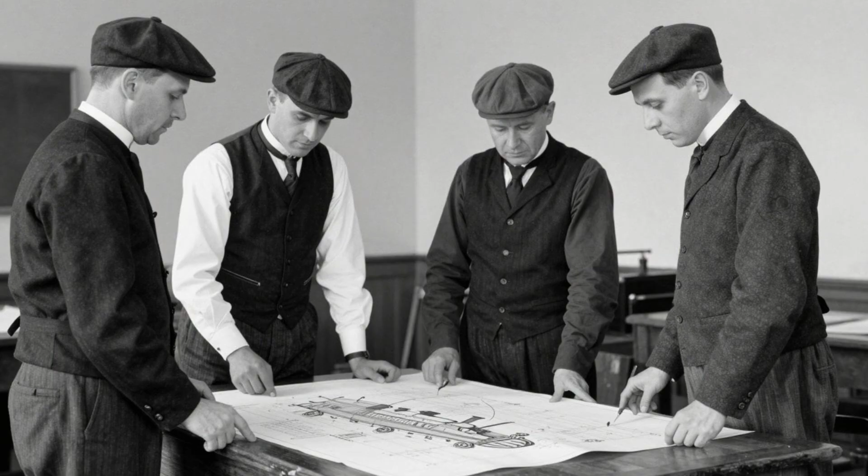But Transfer Order W, 23/1918, suggests those seized German drawings did not just sit in a warehouse. They reached the very engineers tasked with designing America's flagship locomotive.

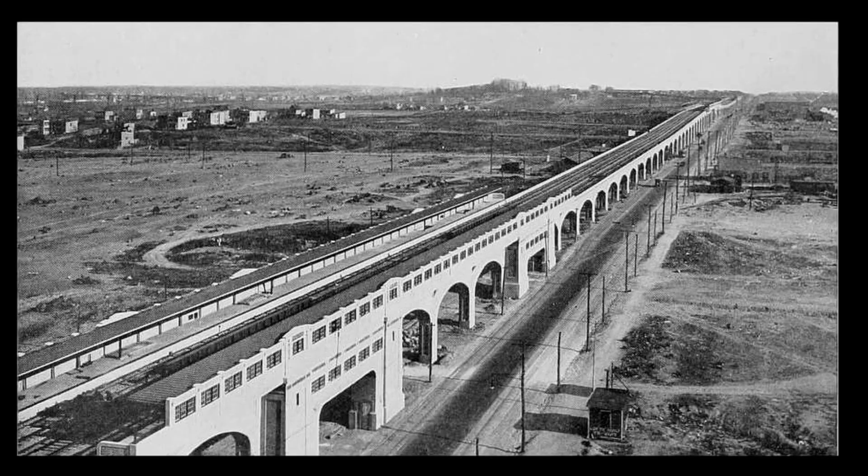To understand how, you have to go back to December 1917, when the federal government seized control of every railroad in the country. On December 26, 1917, the United States government issued a sweeping control order that took command of every railroad in the country. Overnight, the nation's tangled web of private rail lines became a single centrally managed network under the United States Railroad Administration, USRA.

The reason was simple but urgent. America's war effort was choking. Freight cars jammed in yards, coal and munitions were stranded, and troop trains were delayed by days. The old system, with hundreds of companies each guarding their own schedules and equipment, could not keep up with the demands of a global conflict.

Federal officials, led by Secretary of the Treasury William McAdoo, moved quickly. Within days, they set up a war cabinet for the rails, drafting new rules for how trains would run, what would be built, and who would decide.

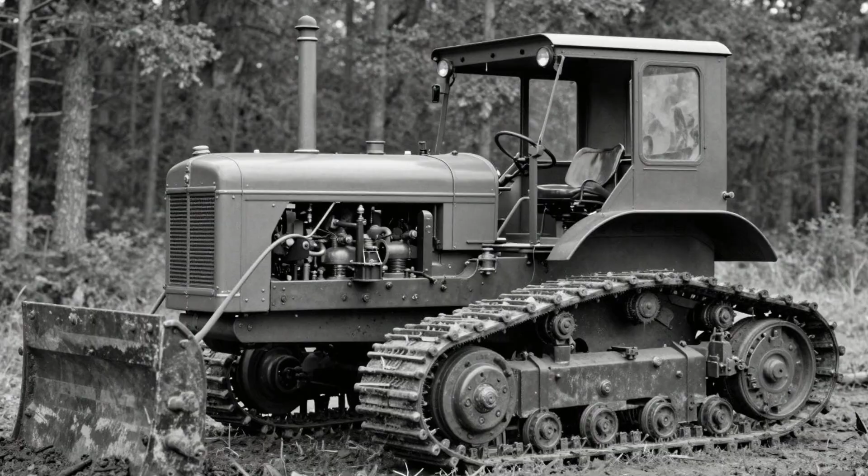At the heart of this new order was a mechanical committee, a handful of top engineers and administrators with a single mandate: standardize everything. No more custom engines for every railroad president's whim. From now on, locomotives, freight cars, even the bolts holding track together would be designed to a common pattern.

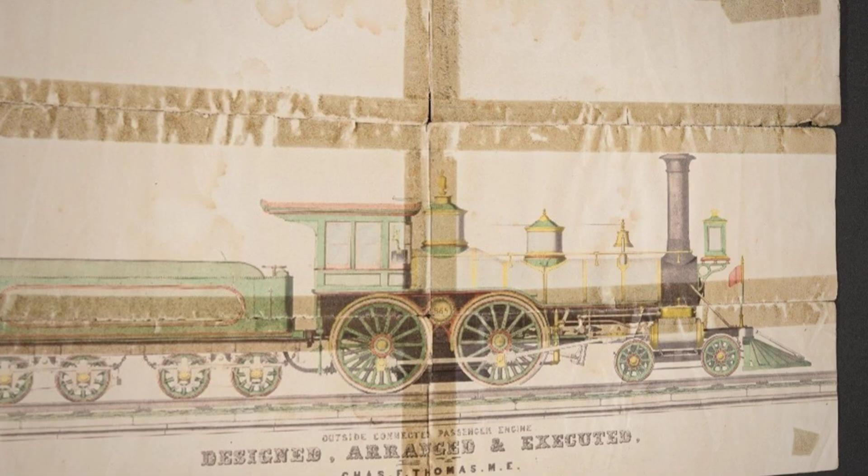The stakes were clear to everyone in Washington. If the USRA failed to untangle the gridlock, the entire American supply chain to Europe could collapse.

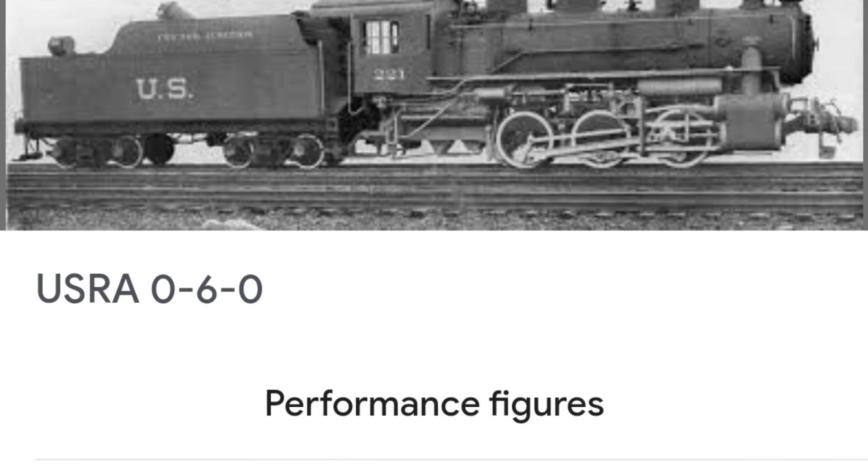The committee's job was not just technical, it was political, strategic, and, as later documents would suggest, even a matter of intelligence. Minutes from their earliest meetings show a willingness to look beyond American borders for answers. They pored over foreign engineering journals, debated the merits of European superheaters, and quietly requested seized enemy blueprints from customs warehouses.

The war had made the usual boundaries of intellectual property and national pride irrelevant. What mattered now was speed, efficiency, and victory. By early 1918, the USRA had begun to draft its first set of standard locomotive designs. Five basic types would be built in quantity, each meant to be interchangeable across the country's vast network. The goal was to keep the trains moving, no matter the terrain or the builder.

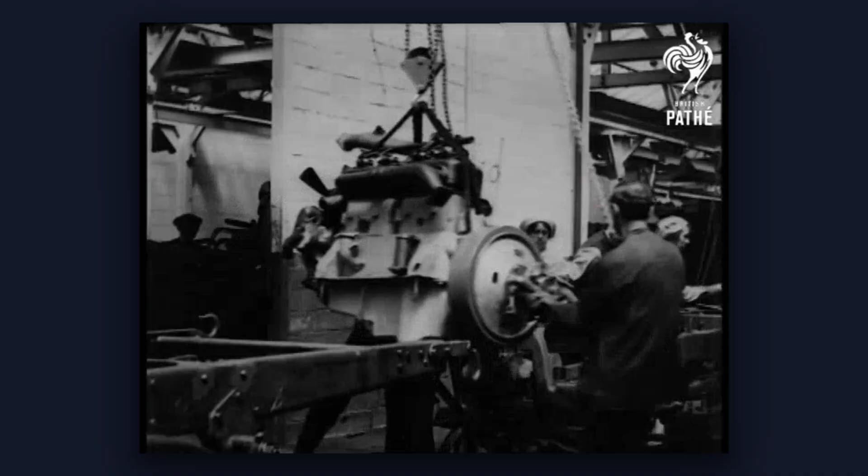But the committee's files reveal another layer: explicit references to German and Austrian engineering, sometimes by name, sometimes in code. The Mechanical Committee's authority was total. Any technical knowledge, wherever it came from, was fair game if it promised an edge.

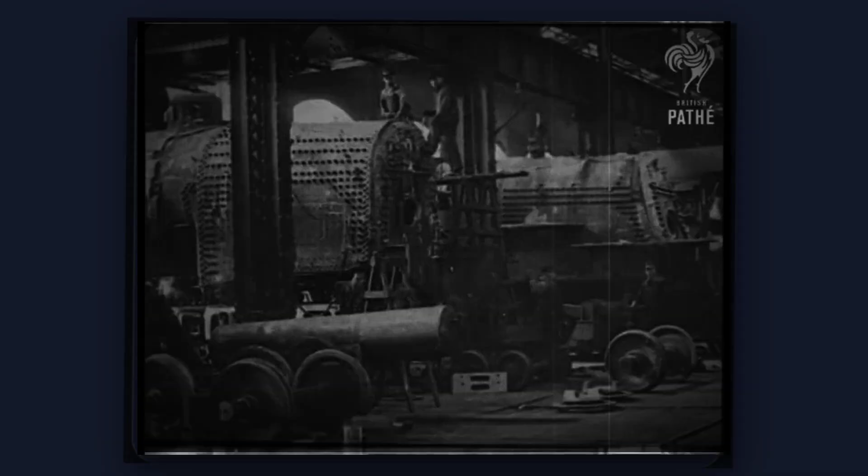The story of American wartime railroading, it turns out, was never just about homegrown ingenuity. It was also about what could be acquired, adapted, or quietly appropriated in a time of crisis.

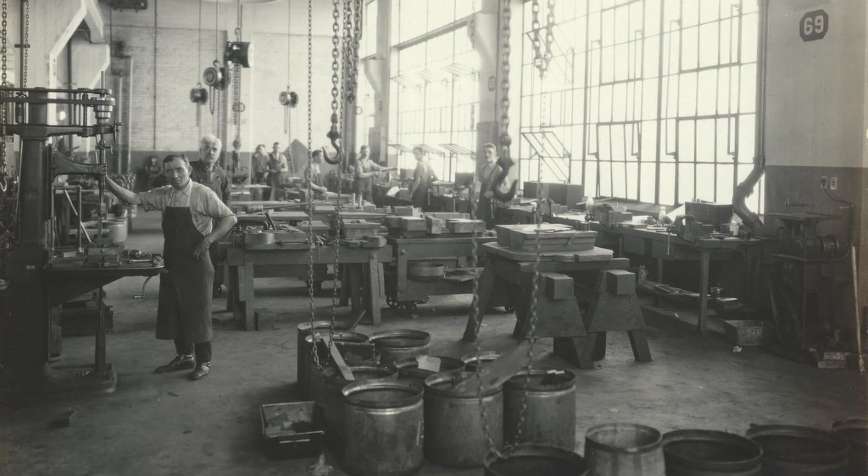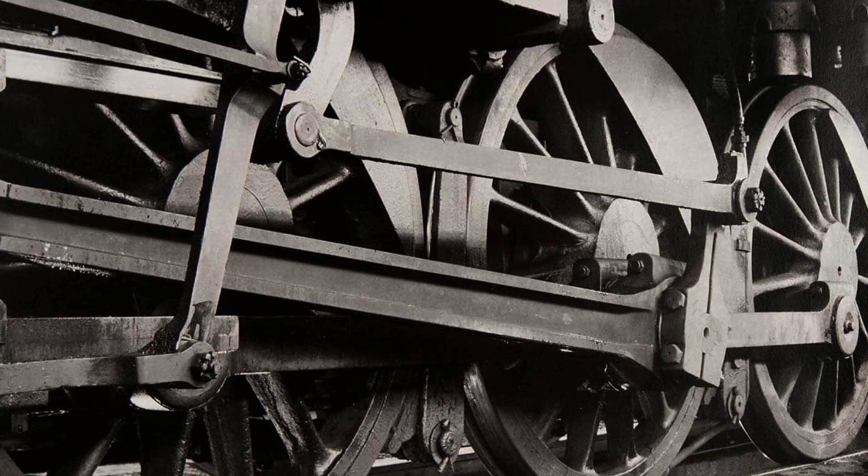Inside the headquarters of the USRA, the Mechanical Committee operated with a kind of wartime urgency that left little room for tradition. The official minutes from July 1917 capture a rare moment of candor. American engineers, facing the limits of their own experience, agreed to cast a wide net. They resolved to examine not just domestic designs, but also the latest advances from Europe, especially from Germany and Austria.

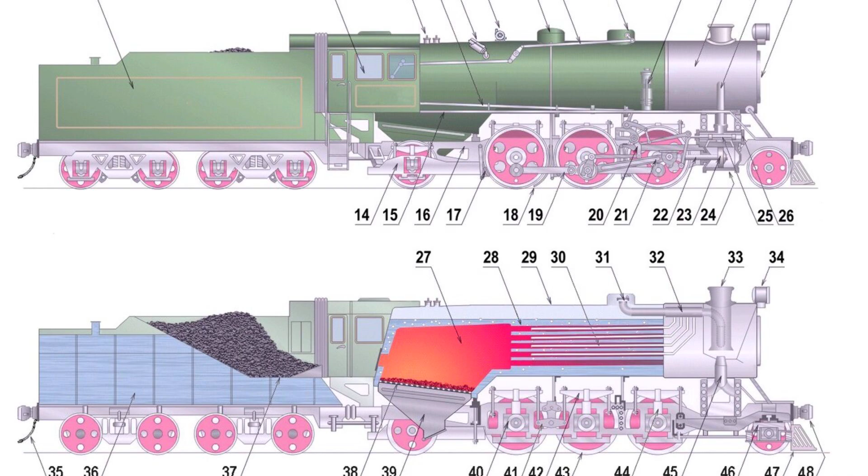The committee's language was pointed. They called for a survey of foreign superheater practice and compound engine arrangements observed on European railways, and set a target. Every new locomotive should be able to handle 210 pounds per square inch of boiler pressure, a figure that matched the best German express engines of the day.

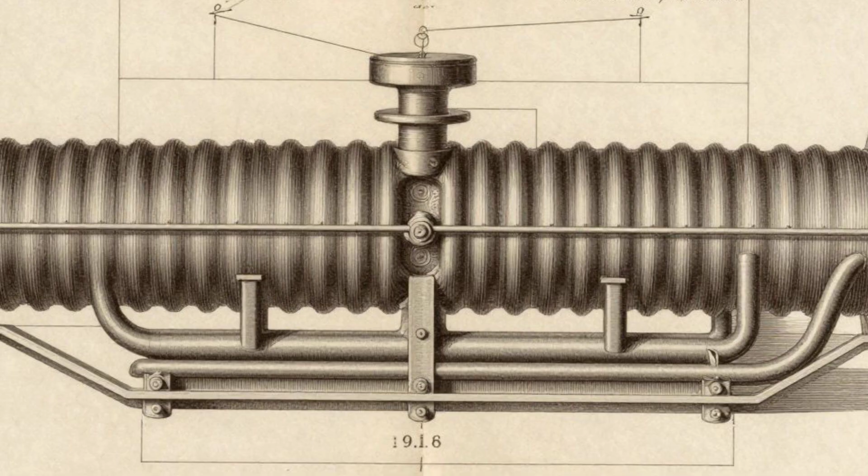This was not a half measure. The committee's July 5, 1917 minutes record a formal resolution to incorporate Heusinger-type valve gear and, wherever feasible, German superheater dimensions into the new 4-6-2 standard.

The engineers did not just read foreign journals, they requested technical sheets from across the Atlantic, sometimes through diplomatic channels, sometimes through less official means. In the words of one committee member, any proven advantage, regardless of origin, was to be considered fair game.

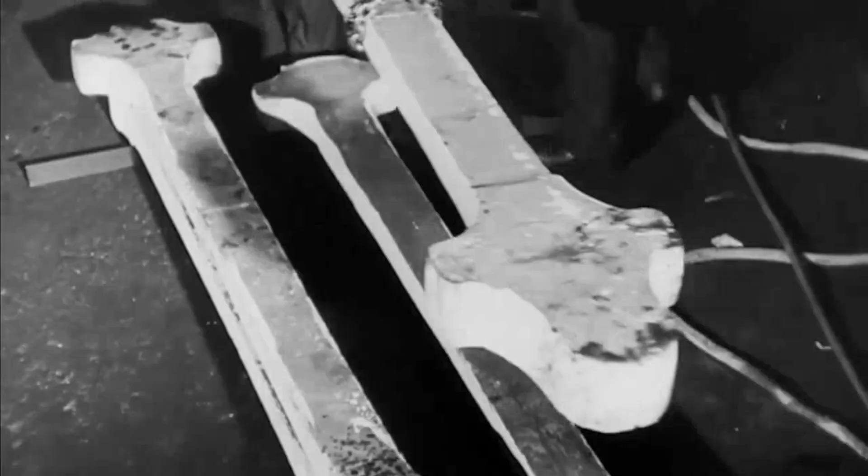The committee's openness to foreign ideas was not just about curiosity. It was a response to the pressures of war and a recognition that American railroads were behind in certain areas. Domestic data on high-pressure superheating was thin.

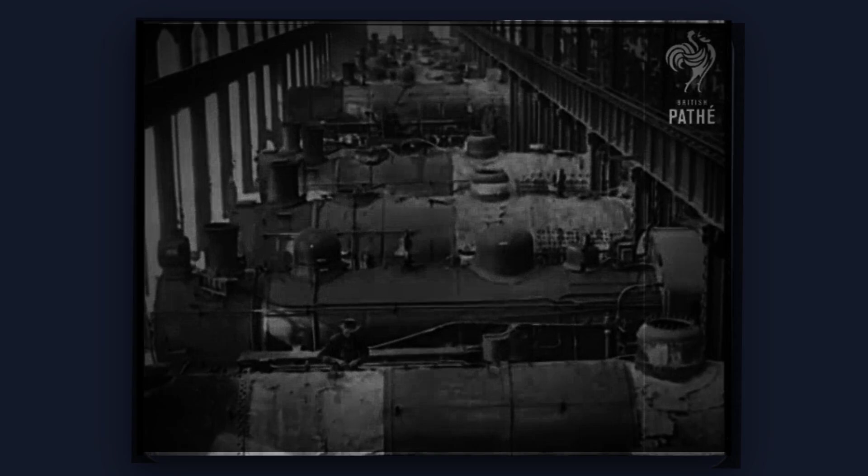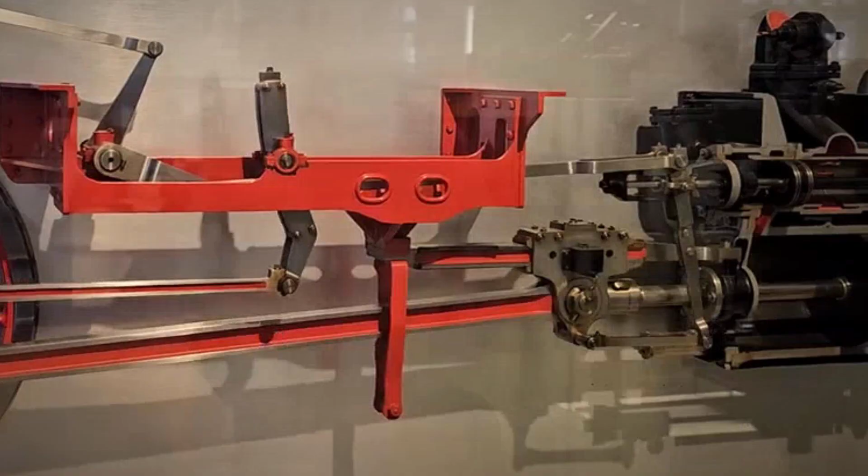European firms, especially Henschel and Krupp, had already demonstrated the ability to run larger, hotter, and more efficient engines. Rather than risk failure, the USRA engineers chose to adapt, borrow, and when the opportunity arose, integrate foreign solutions directly into their designs. This approach set the tone for everything that followed. The committee's willingness to reach beyond national boundaries, to treat seized blueprints and foreign patents as resources rather than off-limits, would shape the technical direction of the USRA standard locomotives. The 210 pounds per square inch boiler pressure, the Heusinger valve gear, the large area superheaters were not just numbers on a page, but markers of a deliberate policy to absorb and repurpose the best of what the world had to offer, even if it meant blurring the line between innovation and appropriation.

The Pennsylvania Railroad's K4 Pacific stood out in American railroading not just for its reputation, but for its numbers. With 80-inch driving wheels, the locomotive had among the largest wheels fitted to a passenger engine in the country, built for high speeds on long, straight tracks.

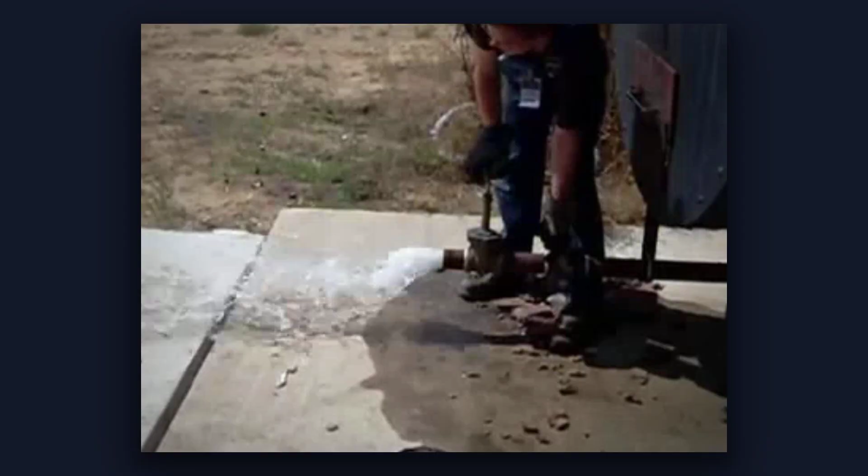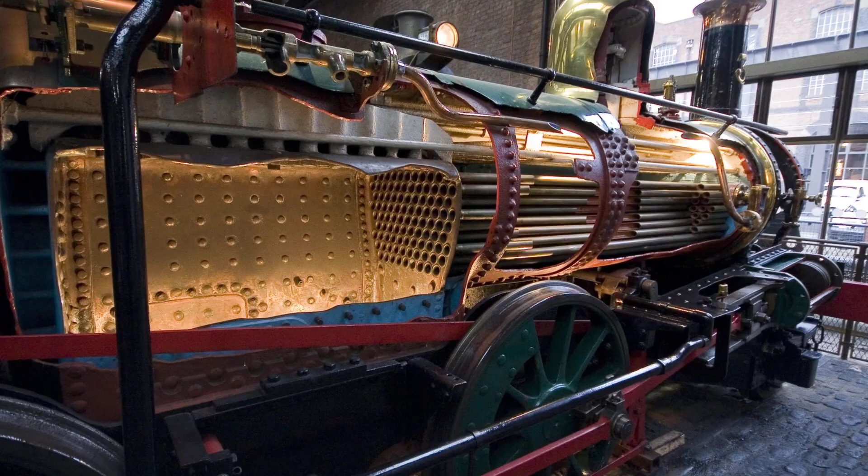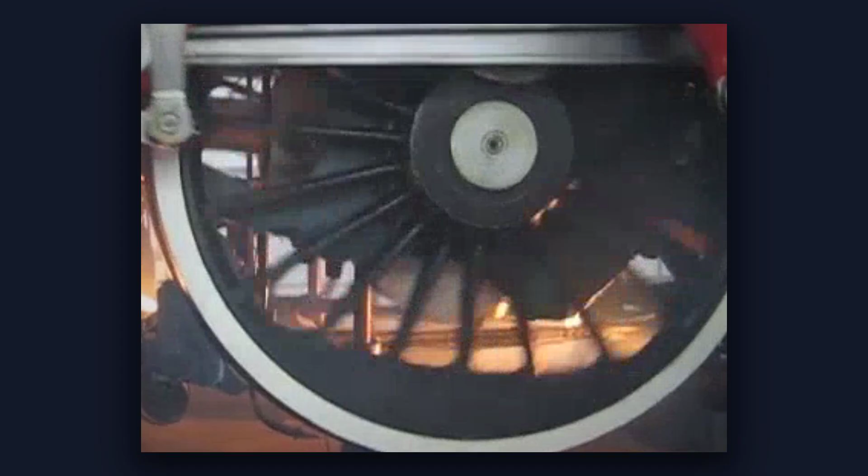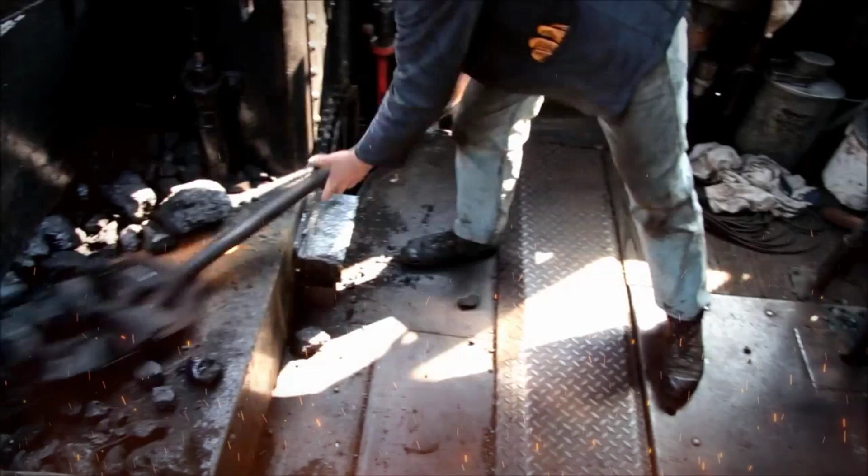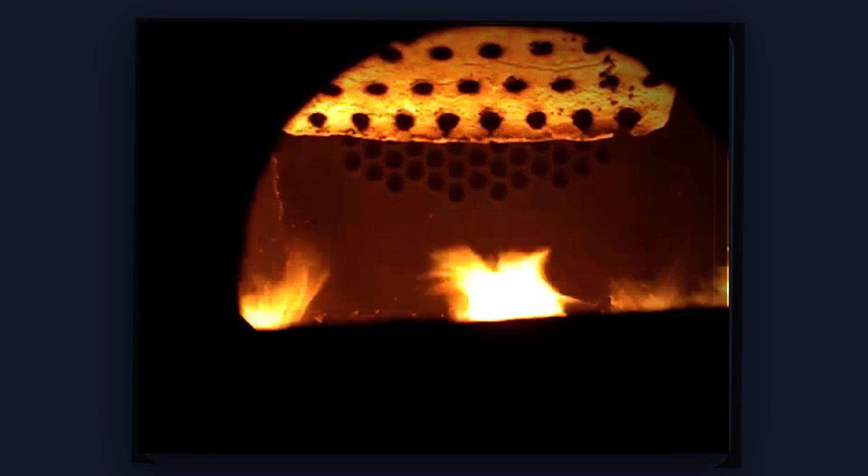The superheater, with an area of 1,140 square feet, raised the temperature of the steam well above boiling, squeezing extra energy from every shovelful of coal. The firebox itself stretched to nearly 70 square feet, wide enough to burn fuel efficiently and hot enough to keep up with the demands of express service.

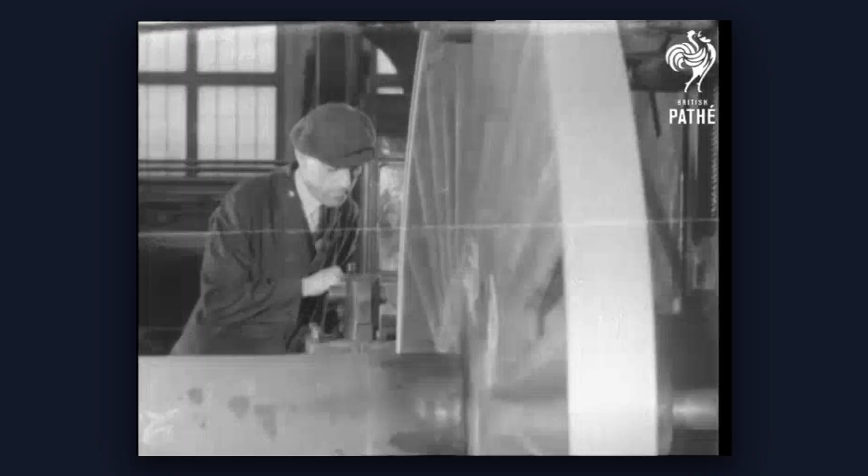These specifications didn't just exist on paper. They were stamped onto construction records at Altoona Works and etched into the daily routine of machinists and boilermakers. Every dimension, every pressure rating, every weight was chosen to meet a wartime mandate: deliver speed, strength, and reliability on a scale the country had never attempted before. The K4's numbers weren't just impressive, they were a statement of intent and, as some suspected, a reflection of ideas that had crossed more than one border.

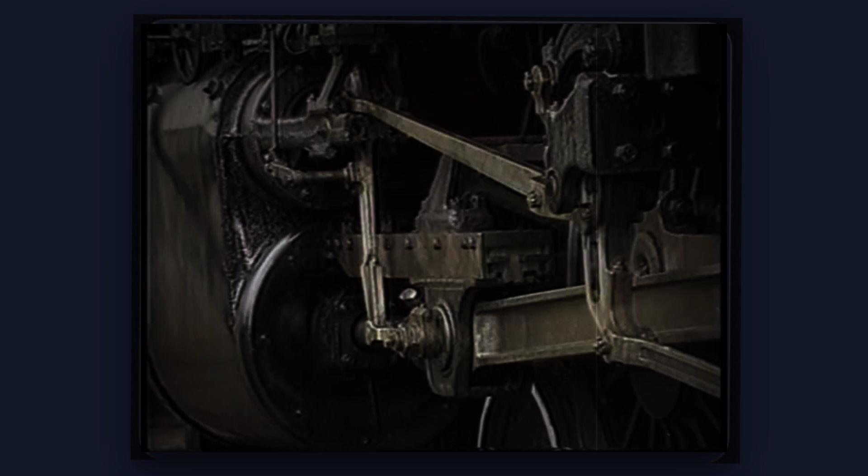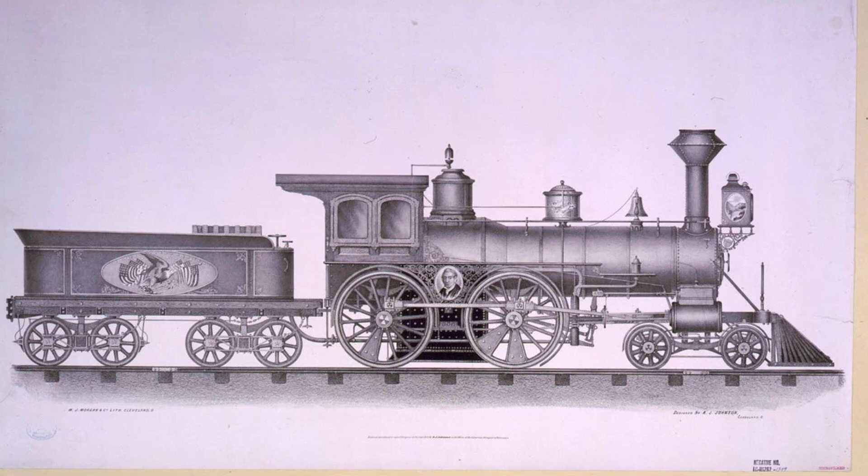The superheater was the heart of the K4's efficiency revolution. At 1,140 square feet, it dwarfed the heating surfaces found on most American locomotives of the era, pushing steam temperatures far beyond the boiling point. This was not just a matter of bigger numbers on a blueprint. The choice to install such a large superheater was a deliberate move. It raised eyebrows among engineers who knew exactly where that idea had gained traction first: Germany.

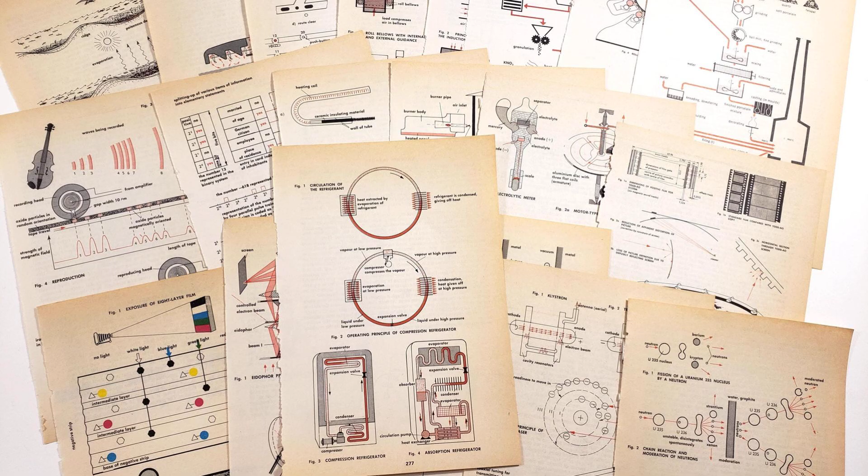Inside Altoona Works, William F. Kiesel Jr., the Pennsylvania Railroad's chief mechanical engineer, kept a meticulous log of these decisions. On April 14, 1918, Kiesel wrote of a meeting with USRA staff. He recorded: 'They presented a German Henschel superheater diagram. I noted the Heusinger valve gear could replace our Stephenson on the new Pacific. We'll draft a proposal to adopt the German-style superheater on the K4 prototype.'

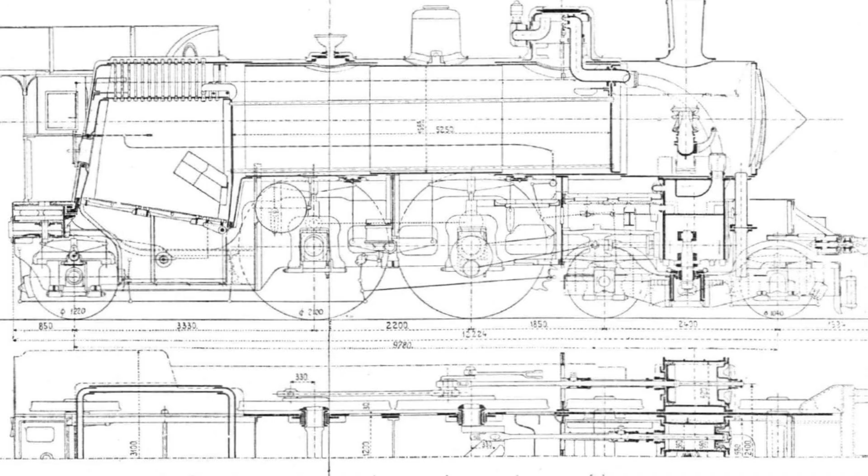Kiesel's diary does not read like a confession, but it does reveal the mindset of an engineer under wartime pressure, one who saw foreign efficiency as fair game. The committee's willingness to consider, and in some cases directly adopt, German superheater geometry was not accidental. At a time when every extra mile per ton of coal mattered, the technical edge offered by European designs became irresistible. The K4 superheater, stamped into the records at Altoona, stands as proof. American ingenuity was sometimes sharpened by a careful look over the fence, and Kiesel's own words capture the quiet pragmatism that blurred the line between inspiration and appropriation.

A compound steam locomotive is defined by its cylinders, specifically by the way steam flows through them in stages.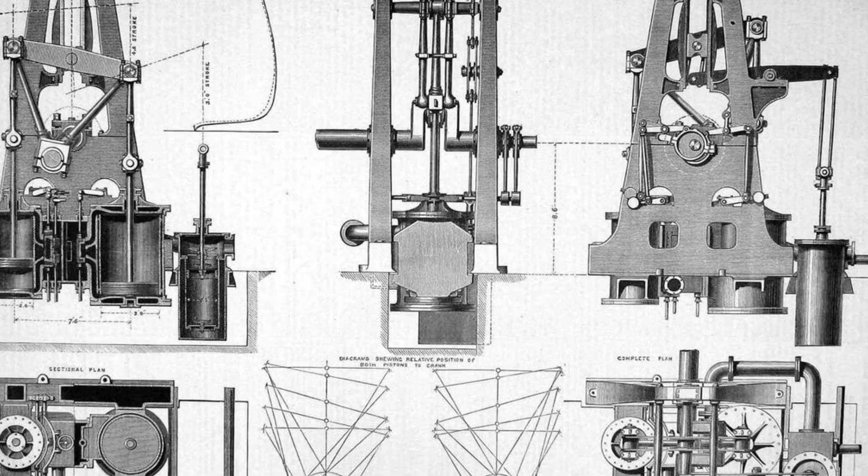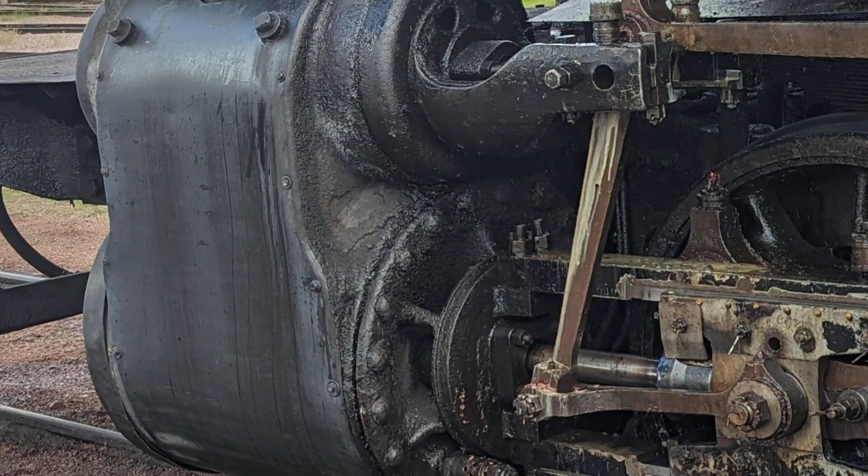In the classic German configuration, high-pressure steam first enters a smaller cylinder, does its work, then exhausts into a much larger, low-pressure cylinder to squeeze out every last bit of energy.

The numbers are precise: a 20-inch by 24-inch high-pressure cylinder paired with a 30-inch by 24-inch low-pressure cylinder, as described in Henschel's 1913 patent DE 261-846.

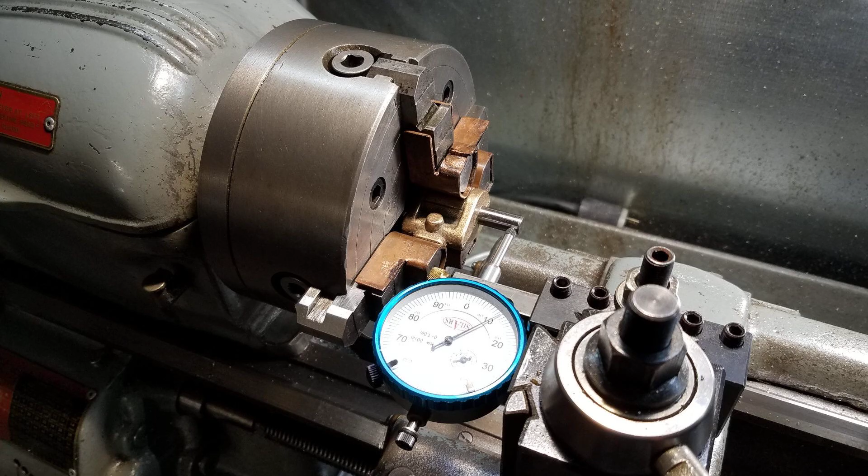This tandem arrangement became the German yardstick for efficiency before the First World War, with each cylinder size carefully matched to the pressure drop and the volume of steam at each stage.

The real secret was in the valve gear. German engineers favored the Heusinger system, a refined version of the Walschaerts gear, because it allowed independent control of steam timing for both high and low pressure cylinders.

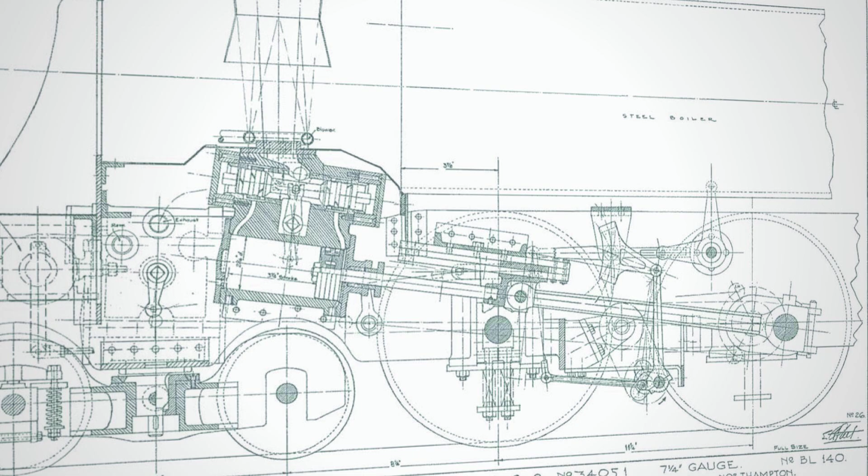Heusinger gear was noted in United States Railroad Administration Committee minutes as early as September 1917, and it was prized for its compactness and precision, especially at the higher piston speeds demanded by wartime traffic.

The mechanism's geometry, with its eccentric rod radius and expansion links set to exacting tolerances, was engineered to deliver maximum power with minimum wear. Superheaters, too, were pushed to their limits.

German compounds often carried more than 1,200 square feet of superheater surface, a figure that matched or exceeded anything in American practice at the time.

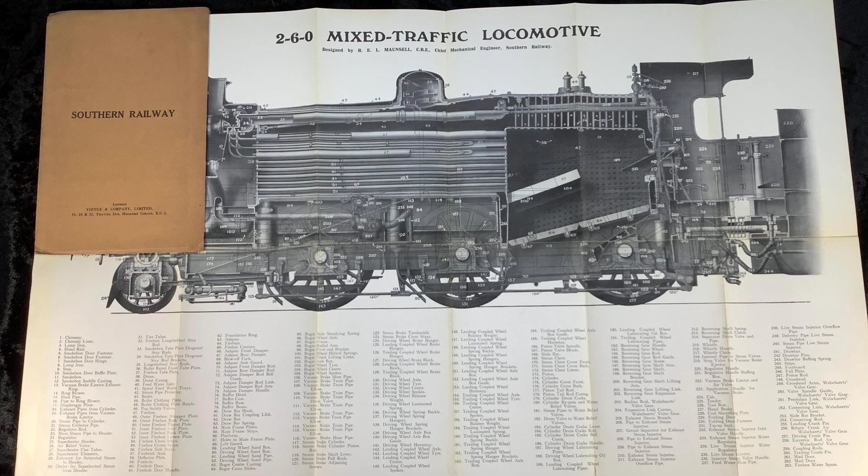The patent drawings show sectional headers and straight tube layouts designed to raise steam temperatures well above the boiling point and cut coal consumption by up to 15%.

Every detail, rivet spacing, boiler taper, balancing weights, was calculated to handle the stresses of high pressure, high-speed running.

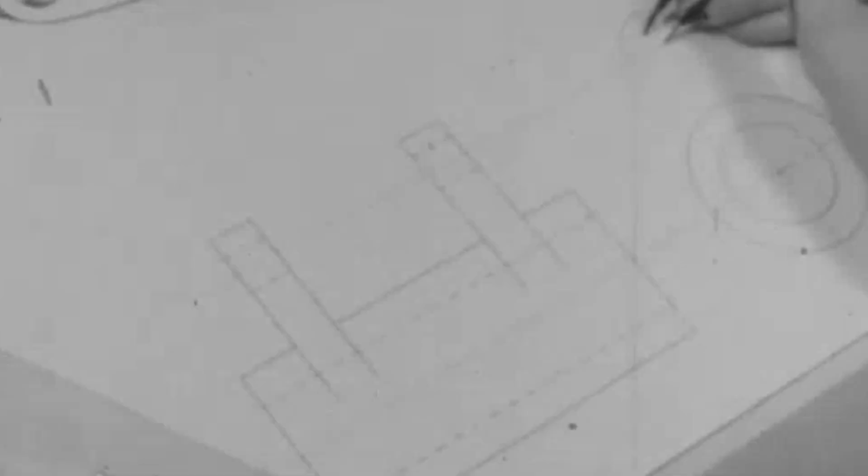What sets the German compound blueprint apart is the way it brings these elements together into a single, integrated system. Cylinder proportions, valve gear, and superheater design are not just technical choices. They are the signature of a design philosophy that values efficiency through staged expansion and careful steam management.

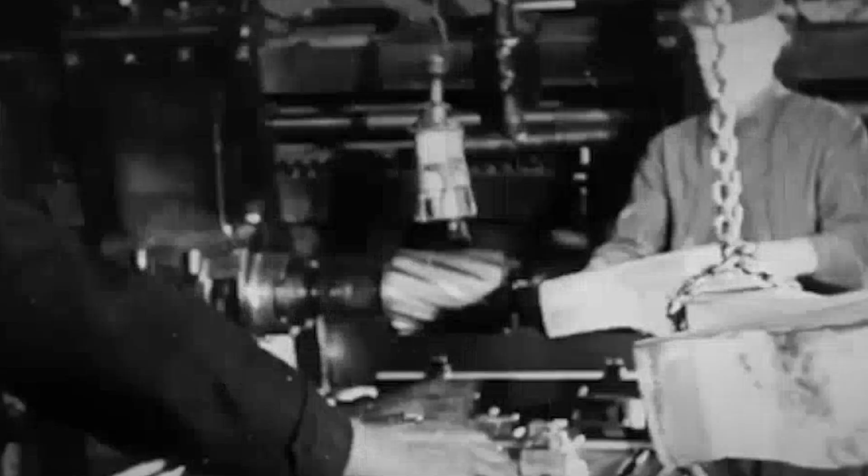The patent number, the cylinder sizes, the Heusinger gear, these are the fingerprints left on any locomotive that follows the same technical path, whether by inspiration, adaptation, or something closer to outright appropriation.

The path from German drawing boards to American locomotive blueprints left a paper trail, both deliberate and undeniable. On February 18, 1918, the War Industries Board issued Transfer Order WN-23-1918, authorizing the seizure and movement of German locomotive technical packets. These files, labeled with serial numbers and stamped as contraband, crossed the Atlantic under military escort.

The Customs Manifest, NYC 1918-0415, filed at the Port of New York, lists a shipment described as locomotive construction drawings from Germany, a 30-item lot, each bundle tagged with the identifier KRULOC 2020NY. The manifest shows a declared value of $12,500 and a recipient, the United States Railroad Administration Engineering Repository.

Once inside the USRA headquarters, the packets did not disappear into a vault. They were logged, cataloged, and entered into the Technical Dossiers Register, their serials cross-referenced with the original German patent numbers.

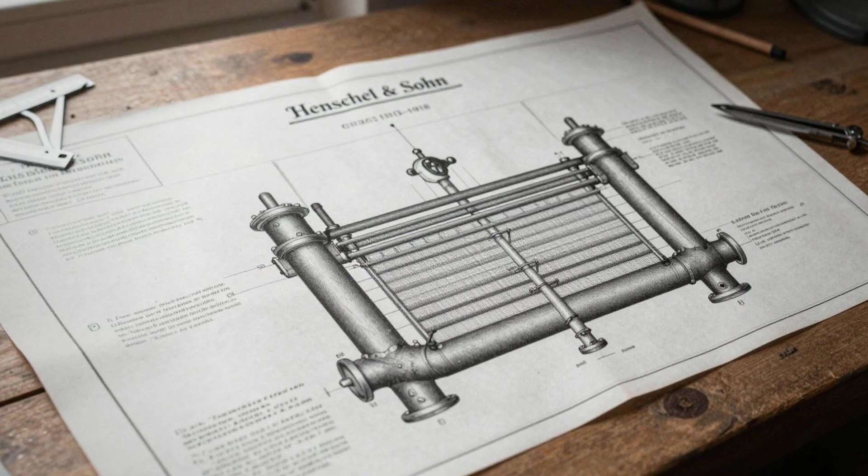DE 261,846 and DE 267,912 among them. Committee minutes from July 1918 record the evaluation of EU-12 drawings and the explicit intention to adapt their superheater geometry for the new USRA standard.

The technical flow was no accident. Each step was documented and each transfer authorized by a line of government signatures.

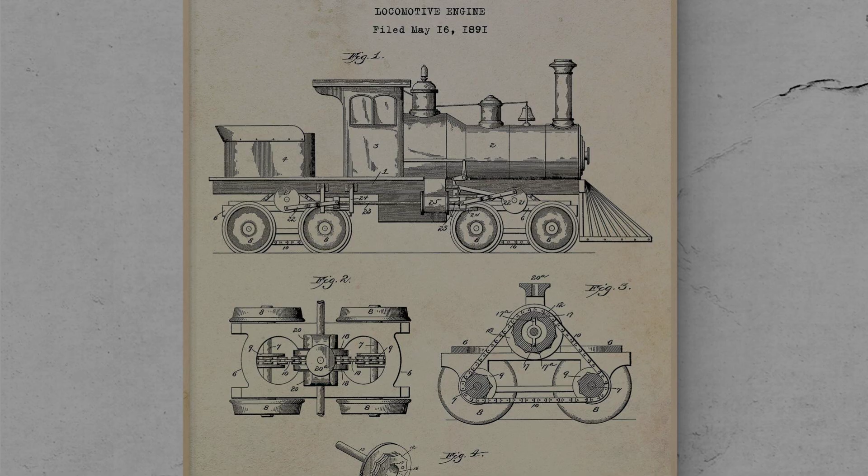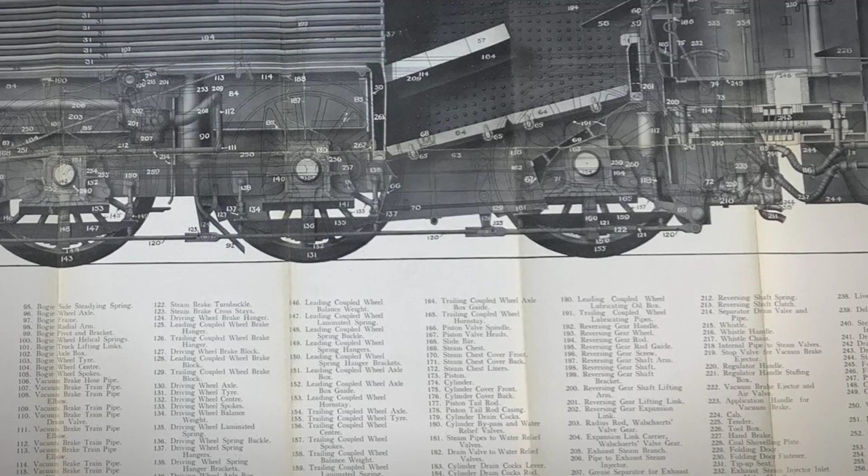The legal machinery did not stop at custody. On June 25, 1918, Baldwin Locomotive Works filed U.S. Patent 1,159,733, titled Improved Compound Cylinder Arrangement, based on Henschel Patent Number DE 261,846. The patent text made no effort to hide its source, stating that the present invention is adapted from the German patent of Henschel and Son.

This was not a case of accidental similarity or parallel invention. The American patent system, under wartime provisions, allowed the direct reissue of enemy designs, provided they passed through the proper administrative channels.

What began as a customs seizure ended as a piece of United States intellectual property, stamped and filed for domestic use. The chain of evidence, transfer order, customs manifest, and patent filing draws a straight line from German workshops to American legal frameworks.

The physical packets, the manifest numbers, and the patent citations all point to a process that was as much about administrative control as about engineering. In the shadow of war, the movement of these drawings became both a matter of national policy and a calculated act of industrial acquisition.

The story of the K4 design is written not just in steel and steam, but in the paperwork that moved ideas across borders, sometimes quietly, sometimes in plain sight. In March 1920, the Ferrocarril Central Argentino, one of South America's most ambitious railway buyers, signed a contract that would ripple across continents. The document, dated March 12th, called for the delivery of new locomotives, each equipped with a superheater labeled EU-12, a model that had appeared just two years earlier in Henschel's export catalogs.

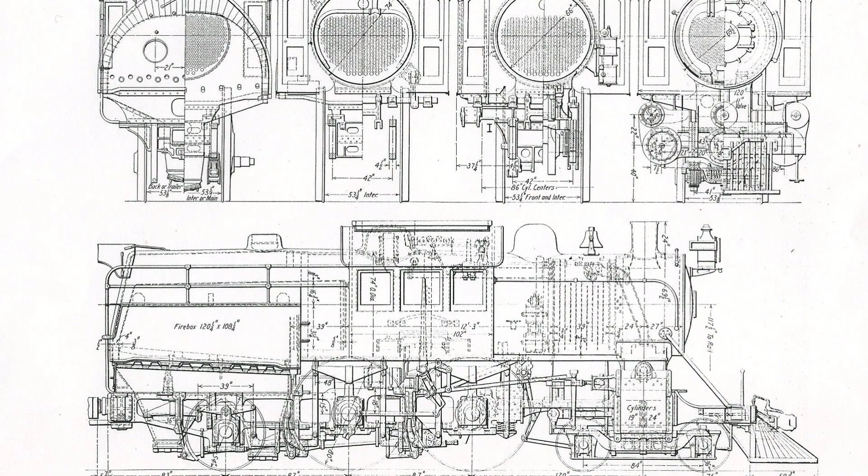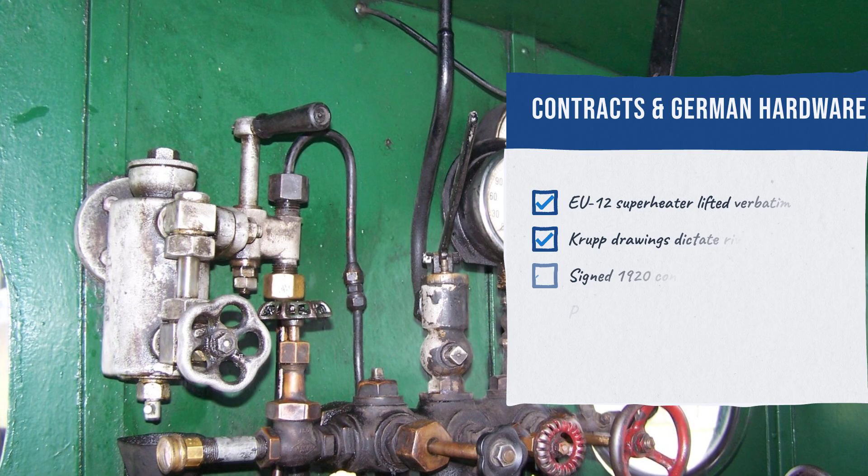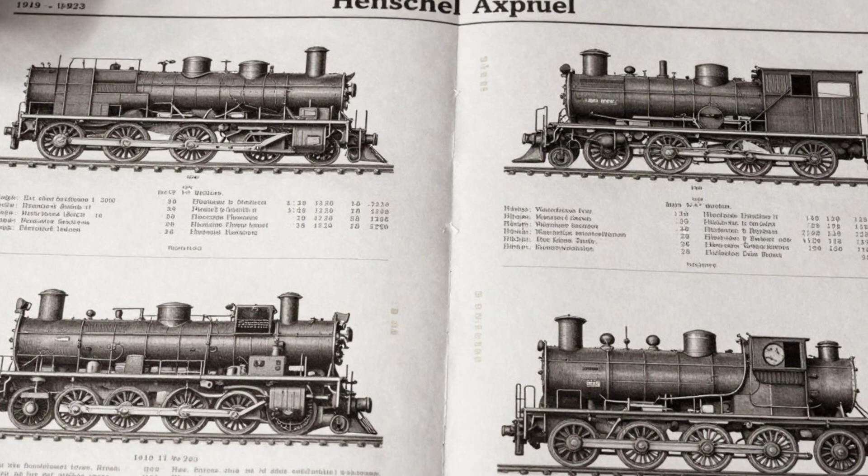The technical annex did not just copy the numbers, it mirrored the German specification line by line: boiler pressure set at 14 kilograms per square centimeter, cylinder diameter at 540 millimeters, and a Walschaerts valve gear, identical in geometry to the Heusinger system described in Krupp's own 1918 blueprints. The catalog pages from Henschel, circulated between 1919 and 1923, offered a side-by-side match, the same superheater layout, the same tube counts, the same flanged headers.

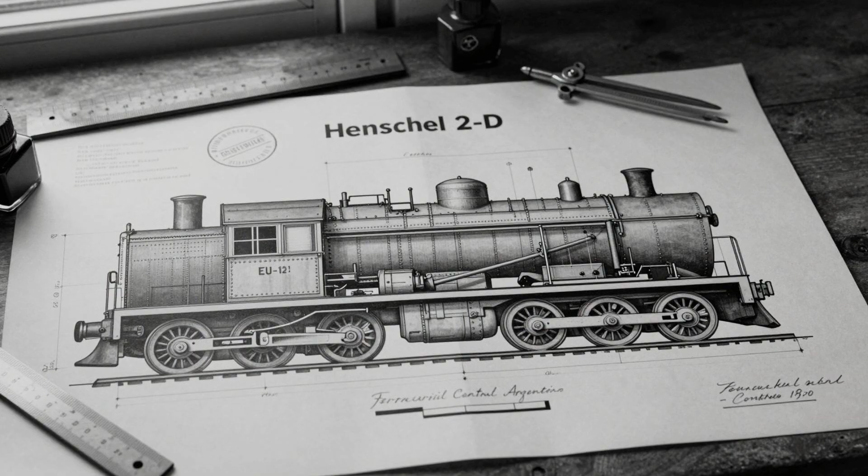Argentine railway officials did not just order locomotives, they ordered the German hardware down to the last rivet. Internal procurement notices published in Buenos Aires listed the EU-12 by name and specified that all parts must be compatible with the 2D series, a direct nod to the export drawings. The hardware that arrived in Rosario in late 1921 carried the same pressure stamps, the same assembly marks, and according to engineer field reports, the same performance characteristics as the German originals.

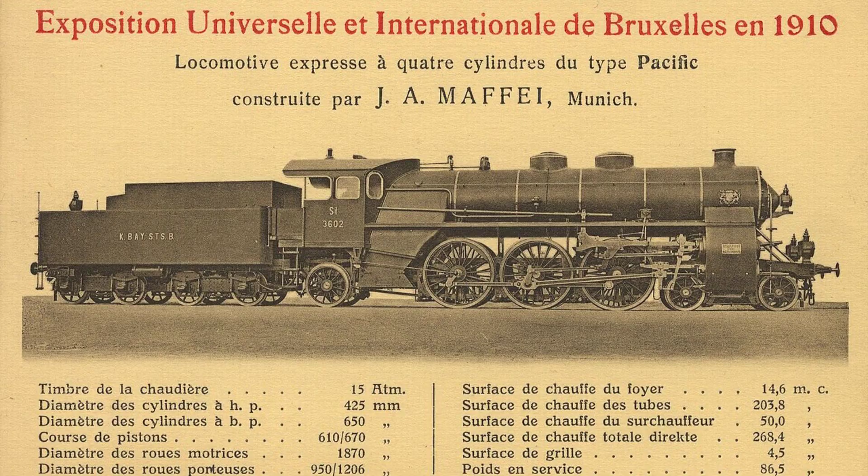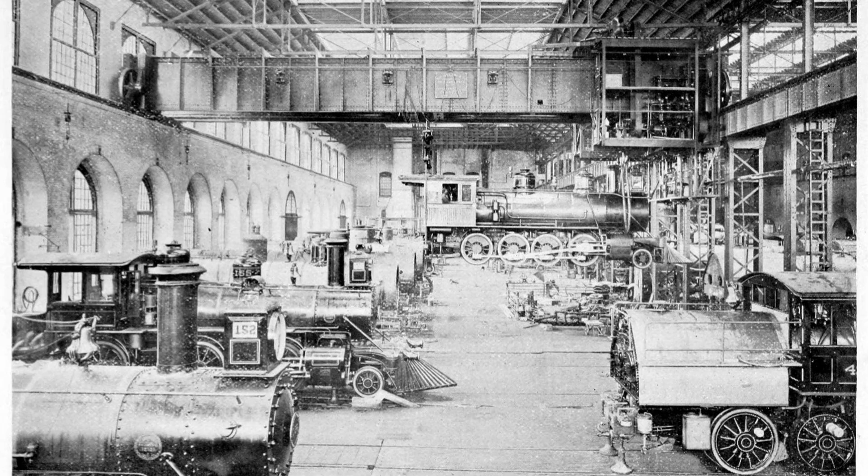No legal dispute accompanied the delivery. The contract included a clause waiving royalties on the superheater design, citing transfer under the War Reparations Commission. For the Argentine buyers, it was a win: European efficiency, American standardization, and no licensing fees. But for anyone tracing the lineage of these machines, the evidence left little doubt. The hardware that steamed out of the Buenos Aires yards was, in every essential, a German engine dressed in South American livery, a physical echo of ideas that had crossed oceans, contracts, and the boundaries of national pride.

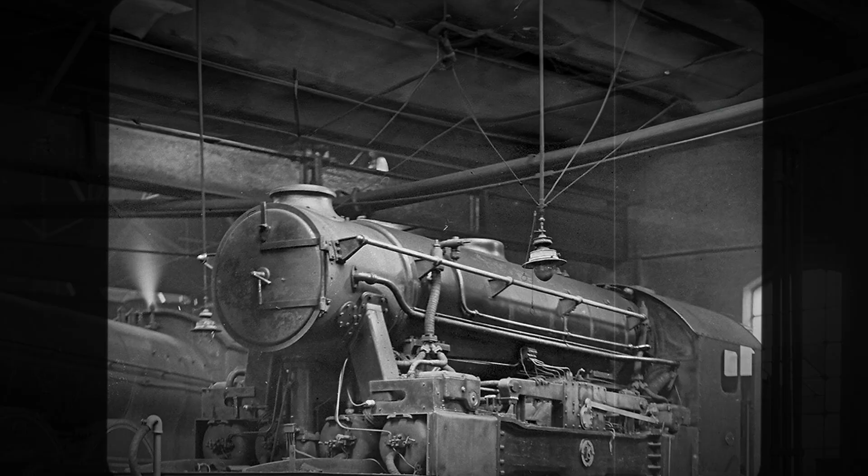Field reports from 1923 described the EU-12 superheater in terms usually reserved for the best German engines. Identical performance, identical efficiency, one Argentine engineer wrote. The hardware that arrived in Buenos Aires was more than a technical match, it was a mirror of the German original, down to the last stamped serial number.

Yet when it came time to settle accounts, the contract included a clause that turned legal convention on its head: all patents underlying the superheater design shall be considered transferred under the auspices of the United States and German War Reparations Commission, and no royalty shall be levied on the buyer. That sentence, buried in the annex, effectively erased any claim to exclusive ownership. The technology, once the guarded property of Henschel and Krupp, became free to anyone holding the right paperwork.

The performance figures only deepened the questions. Argentine Ministry of Transport records from 1922 praised the delivered locomotives for their fuel economy and superheater output matching the German specimens tested at Kassel in 1914. Boiler pressures, valve gear geometry, and even tube counts matched the original patents. The numbers left little doubt about the design's origins, but the legal trail, first through wartime seizure, then through reparations agreements, meant that what might once have been called theft was now, on paper, a transfer.

Still, the ethical boundary remained blurred. The royalty waiver clause was a product of international law, not mutual consent. The engineers who installed the EU-12 superheater in Rosario were working with parts that had crossed from enemy property to public domain in less than a decade. The locomotives ran, the coal burned cleaner, and the contracts were honored. But the question lingered: when does a design stop belonging to its inventor?

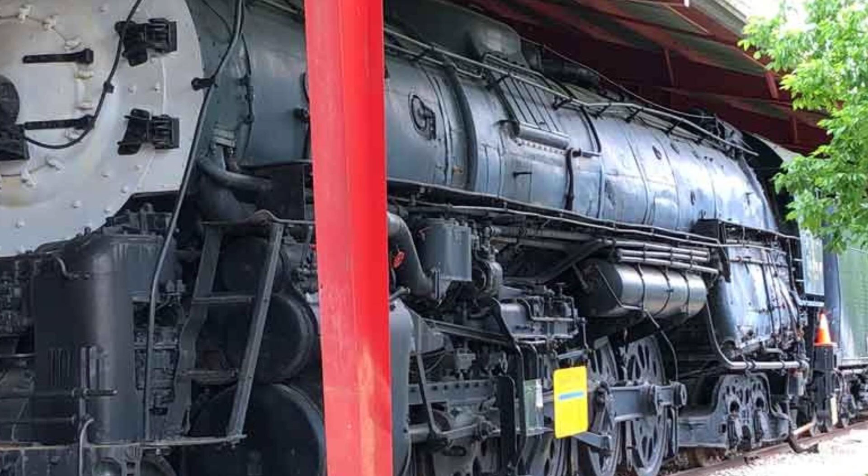In the aftermath, the story of these locomotives became less about technical triumph and more about the uneasy space between necessity and appropriation, a space defined as much by legal language as by engineering skill. Today, the question of whether innovation or appropriation built these engines still haunts global industry. In an era where intellectual property drives power, lines between inspiration and theft remain fiercely contested. What crosses a border isn't just steel or paper, it is the claim to identity and achievement.

In the end, every locomotive carries more than cargo. It carries the unresolved weight of who truly owns progress. What do you think? Where should the line be drawn?